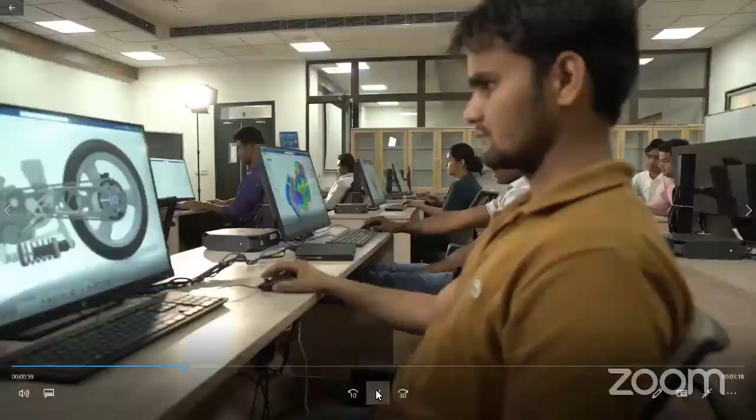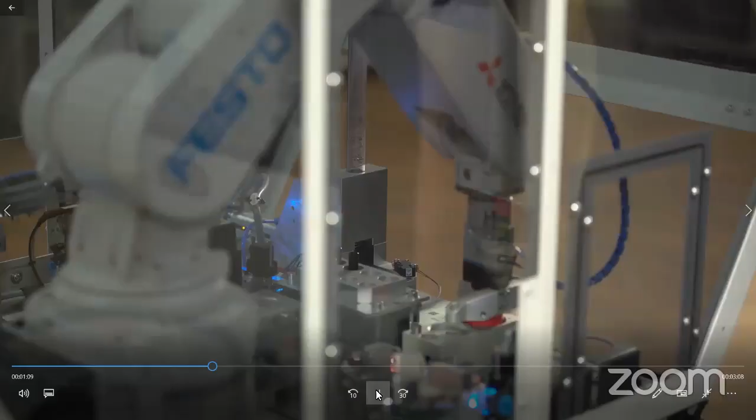To augment the capabilities of the Indian auto component sector in line with the changing customer needs and global technological developments, the ACMA Center of Excellence, Saksham, has been conceived to upscale and create talent for the industry. The Center of Excellence focuses on a four-pronged mission: providing a conducive learning environment for enriched experiential learning, supporting the auto component industry for quality first and safety must, facilitating an organizational culture that places organizational goals above individual ones, and enabling design in India for new product design and development.

In order to provide soft skill and technical skill to the industry, we have created this Center for Excellence along with the partnership of our industry academia such as IIT, AOTS and Maruti Center for Excellence. Setting up of a Center of Excellence has been on ACMA's agenda for last several years, and I'm glad that this year our dream took a concrete shape. We have now an ACMA Center of Excellence, Saksham, set up in Sonipat. Saksham, as you all know, means empowered, enabled.

The Center for Excellence will lean on subject matter experts, industry experts, and look at bridging the gap that exists between existing capabilities in our industry and what the automotive industry will require as we make leaps in terms of technology — implementing new technologies, new processes, aiming for zero defect quality, and digitizing the entire supply chain. All these changes require highly skilled manpower, having the right aptitude and the right attitude.

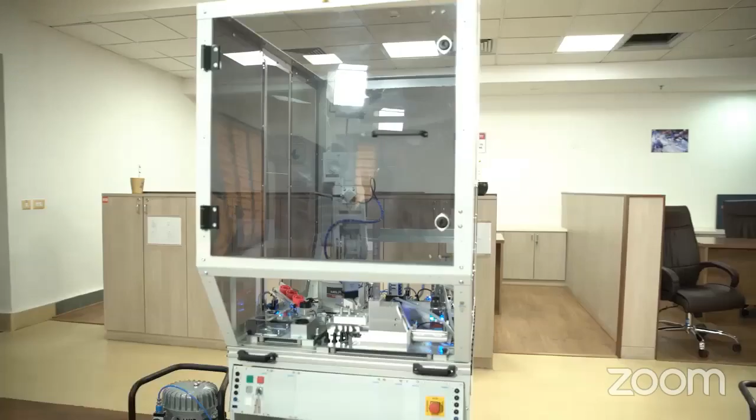The automotive industry in India and globally is undergoing rapid technological changes on the front of emissions, safety, and environment. It is imperative for the Indian auto component industry to ensure that our shop floors, as well as our products, are world-class, as also on the cutting edge of technology.

Our long-term vision is to offer use of the shared resources at the center by the industry for co-development of products and creating intellectual property.

We request the ACMA membership to encourage their associates, to encourage their management to come forward and train at the ACMA Center of Excellence and be future ready.

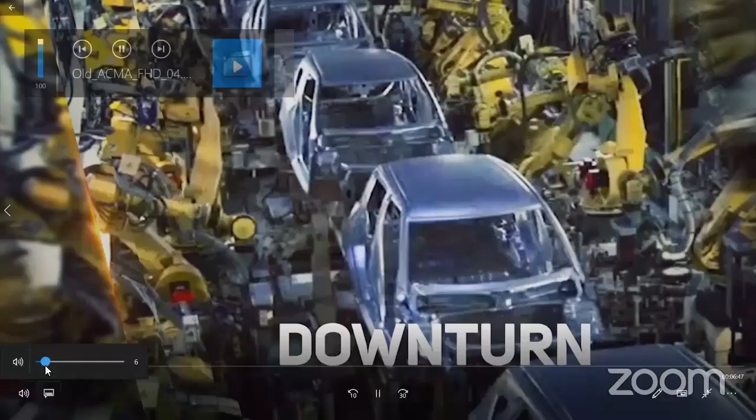The Indian auto component industry is currently facing a downturn and rapid disruptive changes. Now more than ever, it is crucial that we stay on top of inevitable shifts and emerging trends. At ACMA, we ensure that our members stay ahead of the game by empowering them to embrace the discontinuity, turning challenges into opportunities, and being future ready.

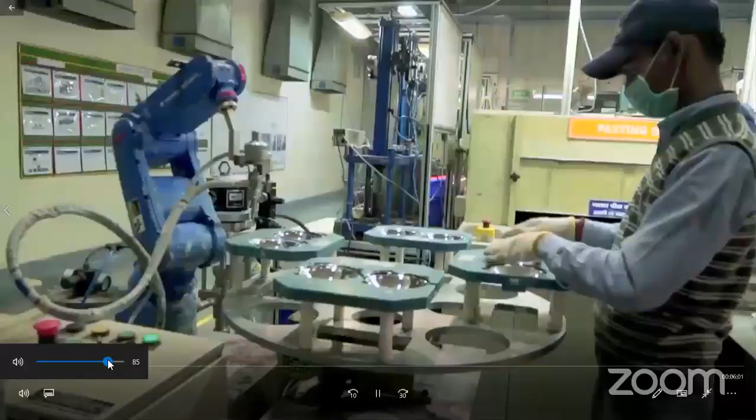The Indian automotive industry registered healthy growth in the first half of 2018-19. However, due to various economic forces, the second half witnessed a significant slowdown. According to SIAM, India produced over 30 million vehicles in 2018-19, a growth of 6.3% over the preceding financial year.

The component industry posted a subdued performance with growth of 14.5% over the previous fiscal, registering a turnover of $57 billion. Auto component exports grew by 17.1% in 2018-19 to $15.16 billion.

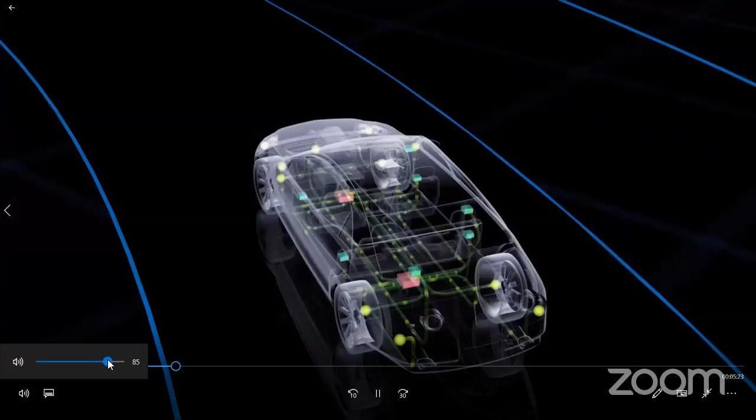In these challenging times, it has become imperative for ACMA to support and assist its members, helping them understand the issues while making the most of opportunities, thereby gaining a foothold on this new disruptive phase that confronts us. ACMA furthers the interests of its members with efforts and interventions in 5 core areas through its pillared structure.

To serve its members better, ACMA opened yet another office in Pithampur, Madhya Pradesh. Propelling business of our members both nationally and internationally, ACMA's business development pillar spanned the entire year with significant initiatives.

On the home front, the 4th ACMA Auto Mechanica New Delhi, one of the country's premier aftermarket events, saw participation from more than 600 exhibitors from 16 nations. The 3rd iAuto Connect was a successful reverse buyers and sellers meet that witnessed healthy participation from domestic manufacturers and international buyers.

Other significant initiatives included the 3rd ACMA Northeast Aftermarket Expo 2018, the ACMA Value Chain Summit Ahmedabad, and the XEV Localization Conference and Exhibition centered around the FAME2 scheme and phased manufacturing program. This showcased our members' prowess in EV component manufacturing.

The first Raw Material Conclave Conference and Exhibition in New Delhi saw participation by several steel and aluminium suppliers and significant attendance from ACMA membership. On the international front, we have had successful participation in several exhibitions.

On the front of knowledge engagements, ACMA continued to work with several internationally renowned consultants as its knowledge partners and has published several studies and reports on topical subjects during the year.

ACMA made significant strides on the front of education, skilling and mentorship this year. With the mission of establishing world-class shop floor practices and learning through sharing, ACMA's cluster programs have benefited more than 1,000 manufacturing units till date.

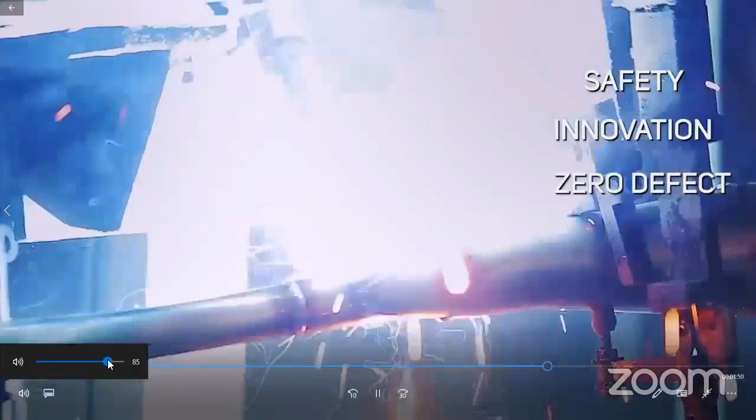This year, ACMA upgraded 150 companies through 23 cluster programs with focus on safety, innovation, zero defect, resource optimization and manufacturing excellence. Saksham, the ACMA Center of Excellence, is shaping well.

The center, set up at the Sonipat campus of IIT Delhi, has AOTS of Japan, Cardiff University, IIT Delhi, Maruti Center of Excellence, UNIDO and VDA of Germany as knowledge partners.

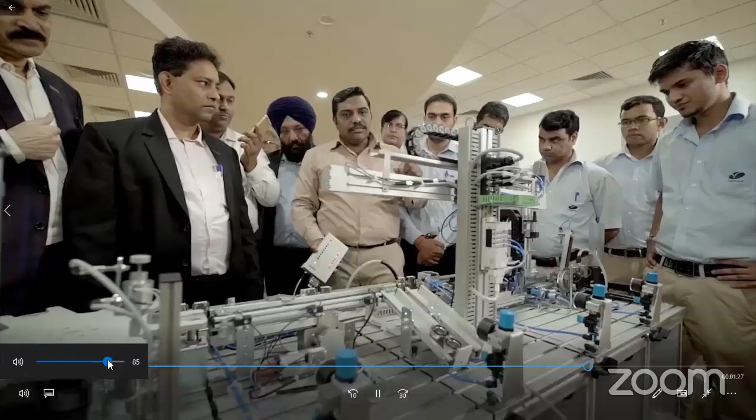The center is well equipped with a state-of-the-art mechatronics lab and a design lab. Since its inception, it has been able to support 50 member companies and has trained over 150 personnel. We plan to replicate such centers across the auto component hubs in the country.

Several capacity building workshops in different domains such as HR, soft skills, team building, competitiveness building, and leadership development were organized in different regions to further the agenda of Pillar 3.

ACMA continued its efforts to facilitate strategic partnerships in the industry. ACMA organized an investment mission to Poland, Hungary, and Slovakia in February 2019. The objective of the mission was to understand the dynamics of the automotive market and investment climate in these fast-growing Eastern European economies, besides exploring opportunities for strategic alliances.

ACMA signed strategic MOUs with the Australian and Polish automotive associations during the course of the year. On the front of industry and ACMA image, the association continued to champion the cause of the industry through effective campaigns on print, digital, and social media.

As the landscape of the auto component industry changes fast, ACMA will continue to facilitate and support its members in their efforts to remain relevant and globally competitive. ACMA, your facilitator in realizing the future.

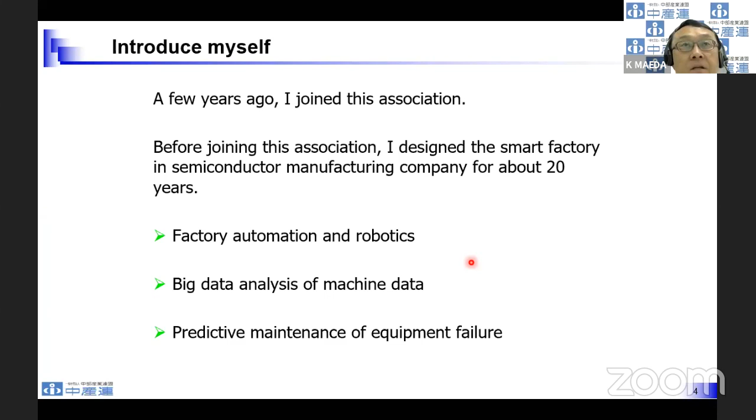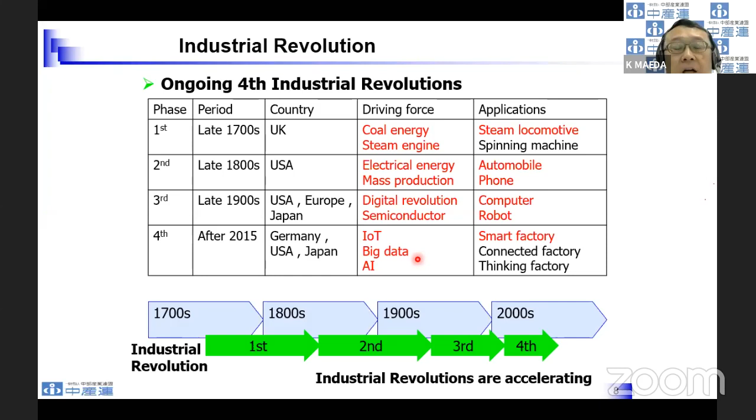There are 5 key persons of each industrial revolution. Do you know everyone? He is Jeff Bezos. Jeff Bezos is the famous richest person in the world. Amazon - even with coronavirus, Amazon sales in the second quarter of 2020 increased 40%.

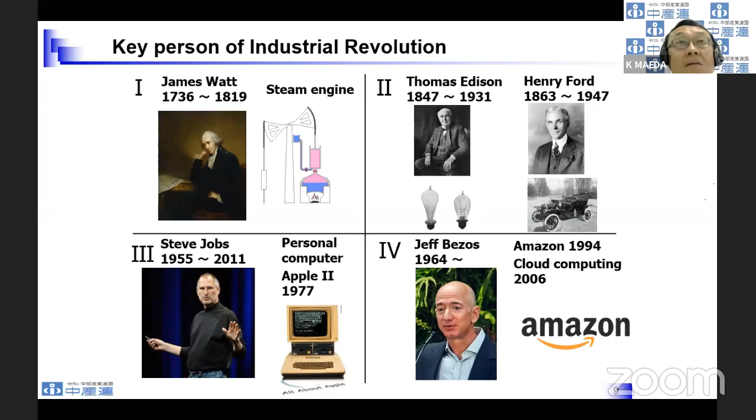This slide shows the fundamental technology of IoT. There are 3 basic technologies of IoT. One is the sensing device. The sensing device collects external information, like a human eye or ear.

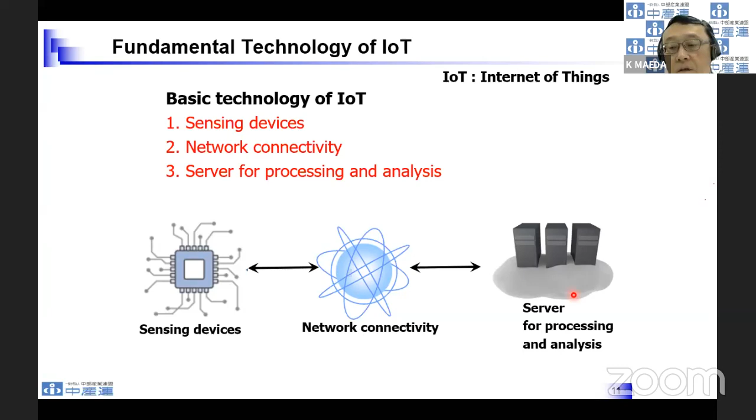I will explain each technology. Okay, let's go to the next page. Number one is the sensing device. A sensing device can be defined by a sensor and an edge computer.

Smart factories use many sensors. A simple example of a sensor is like in a smartphone - camera, gyro, accelerometer, temperature - many sensors are built into the smartphone.

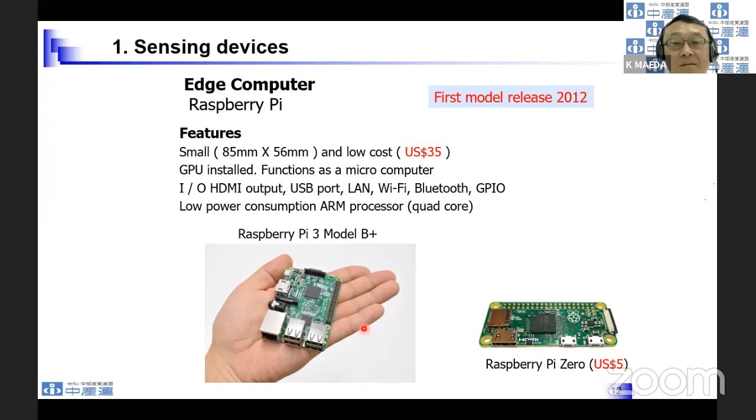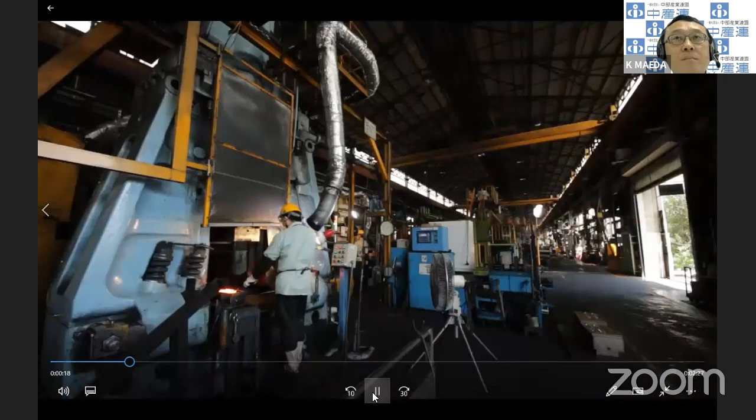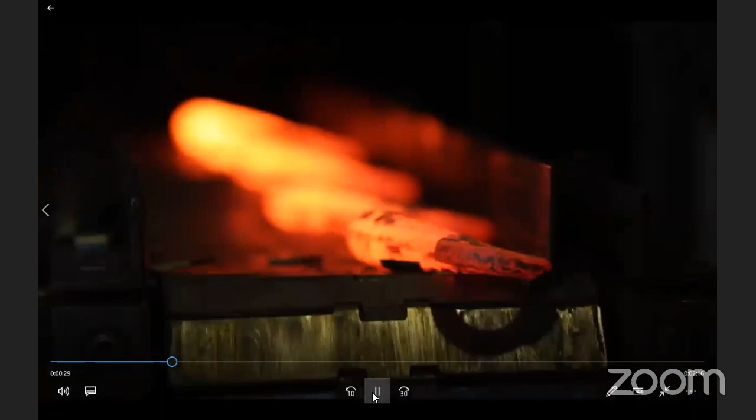This movie is made of 3 parts. Part 1 is the forging process. The signal light turns to red.

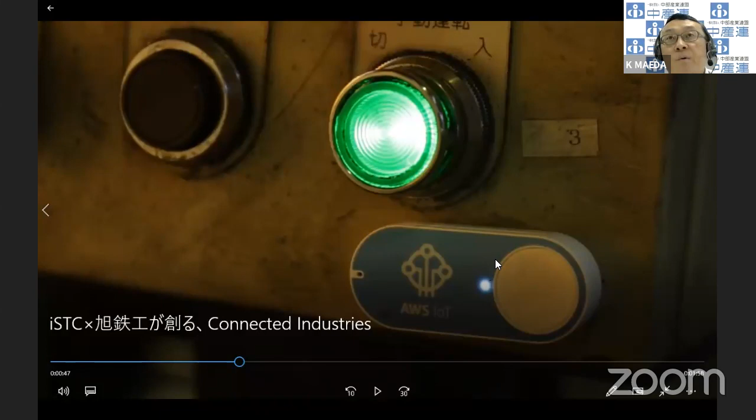The machine status changes to abnormal. The operator pushes this button. This button is the AWS IoT button by Amazon. He is a technician; he receives a mail about the machine abnormality on his smartphone. The technician rushes to the workplace.

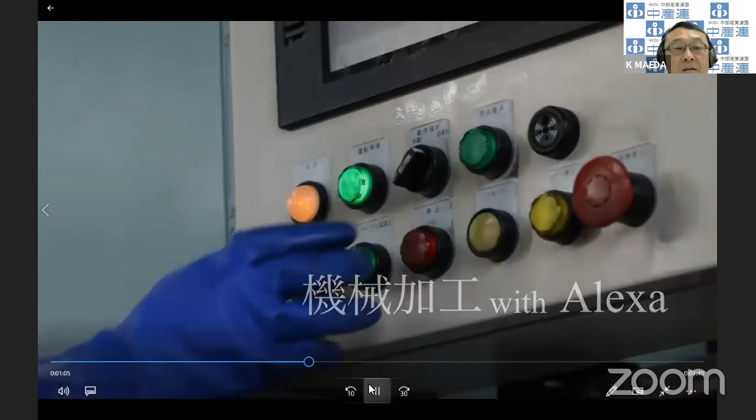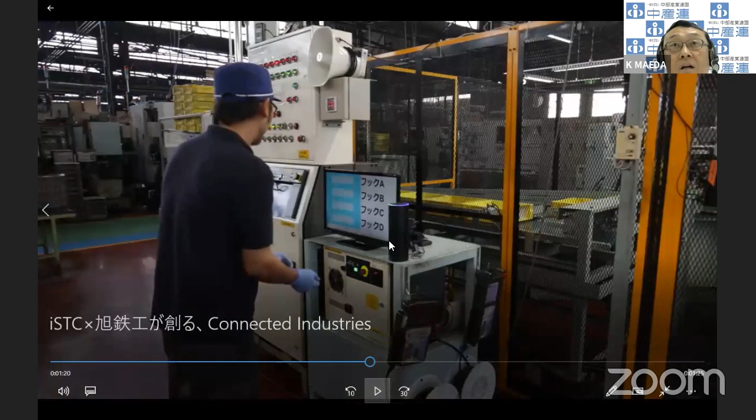Part 2 is the machining process. This is Alexa, a smart speaker by Amazon.

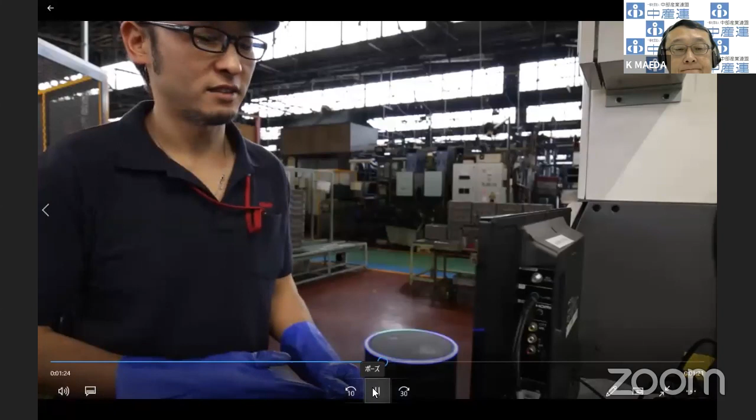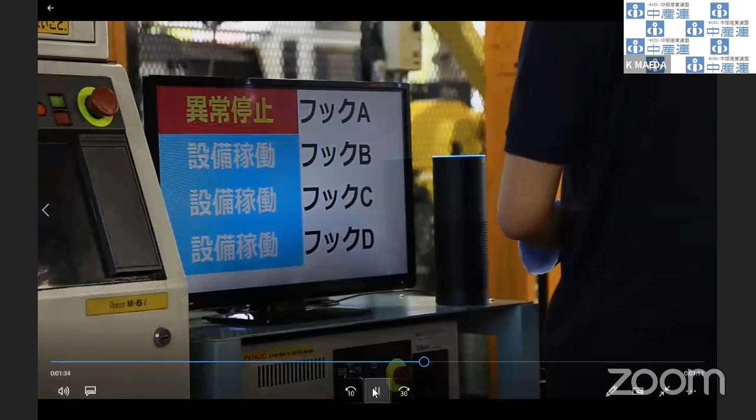He is the operator. The operator informs Alexa of the setup change. Alexa changes the machine status from running to stop.

Part 3 is the office. He is the manager of this factory. The manager inquires of Alexa about the status of production. Alexa answers that the production status is good.

The manager tells Alexa, 'Line leader, do a good job.' He is the line leader. The line leader receives a mail by smartphone; this message says good job.

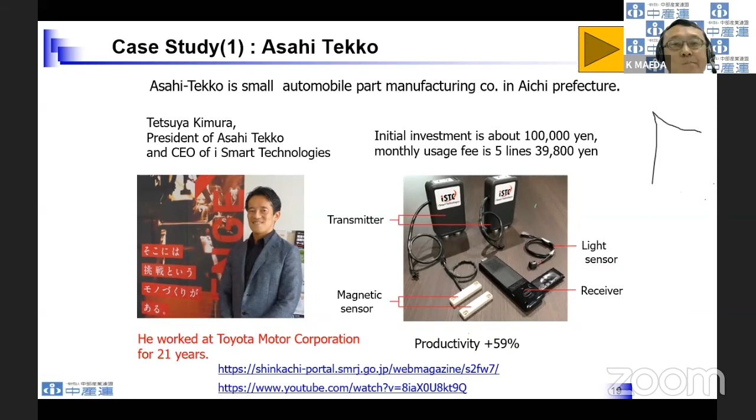Next slide. Why did the company's IoT succeed? You could build an IoT system just like this video. However, this IoT system does not make a profit.

President Mr. Kimura understood the Toyota production system, so improvements are possible. He said if there is a problem with a machine or worker, it will appear in the cycle time. Cycle time means the time to make one product.

So he analyzed the cycle time with IoT. Let's show this graph. This graph is the cycle time of machine A and machine B. Machine A is blue, machine B is red. Machine A and machine B have different cycle times. Machine B is delayed about 5 seconds.